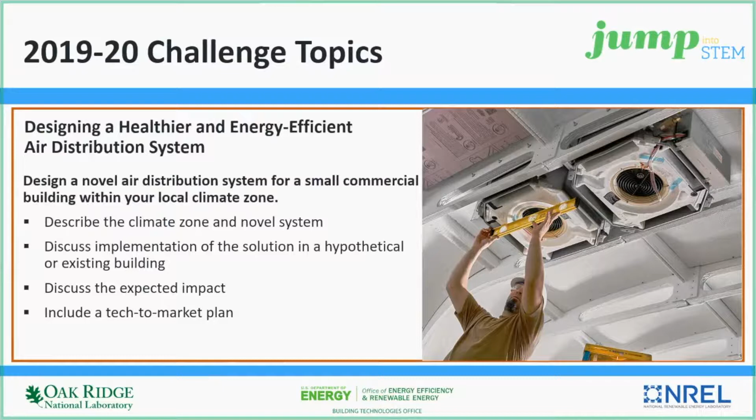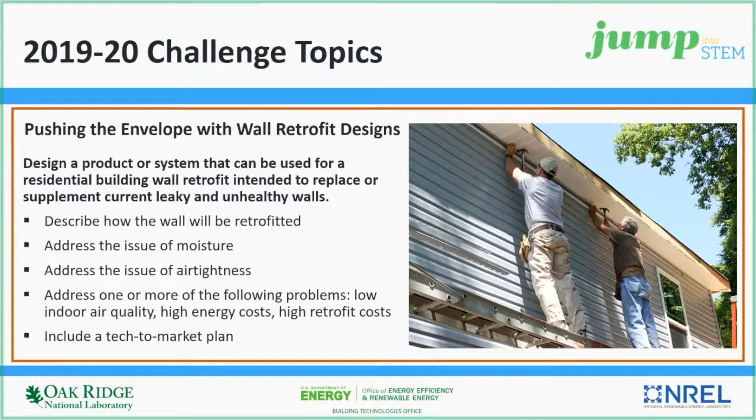We had 3 internship winners from last year's Jump into STEM competition. We had 2 interns at NREL and 1 intern at Oak Ridge National Lab.

At NREL, Jump into STEM intern Cade Lawson worked on Comstock, one of the building energy modeling tools for the entire building commercial stock of buildings in the United States.

Our Jump into STEM intern Sarah Tinsley worked at Oak Ridge on EnergyPlus and OpenStudio modeling, for commercial building energy modeling. And Carl Woodard worked at NREL on developing thermal energy storage through the use of phase change materials.

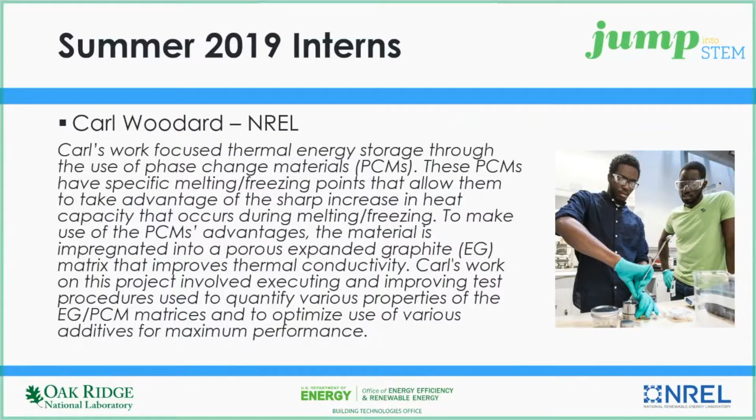At this time, I'd like to introduce our technical presentation and our technical presenter, Dr. Michael Kane from Northeastern University. His topic is going to be on occupant-centric building controls. Dr. Michael Kane received his BS in architectural engineering and his MS in Civil Engineering from Drexel University. He has an MS in Electrical Engineering and a PhD in Civil Engineering from the University of Michigan in Ann Arbor. Dr. Kane is an assistant professor of Civil and Environmental Engineering at Northeastern University.

Prior to this, he was a fellow at the United States Department of Energy's Advanced Research Project Agency for Energy, or ARPA-E, in Washington, D.C. He currently directs the Automation for the Built and Living Environment Lab at Northeastern, and his research interests are in the areas of bilinear and hybrid control and human-in-the-loop control of infrastructure systems. At this time, I'm going to turn it over to Dr. Kane for his presentation.

Thanks for that introduction. Can you hear me? Yes. Great, let me switch it over to my screen. Looks like a fun Jump into STEM program, looking forward to seeing what the submissions are on IdeaScale.

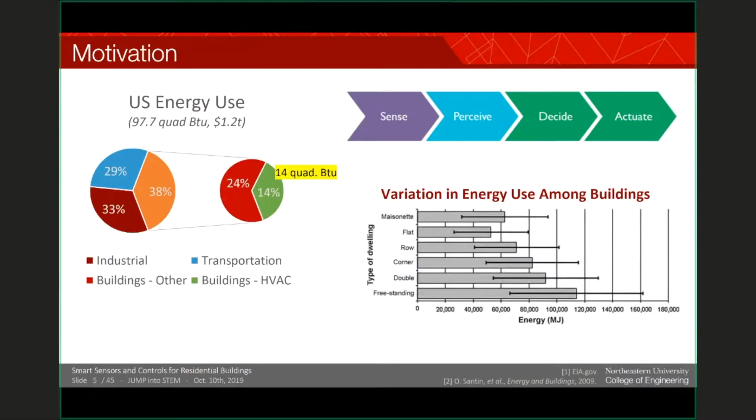It's because a large percentage of this variation—so this is saying if we were to try to estimate how much energy a building consumed based off of just what type of dwelling it is, that's not going to tell us a whole lot. And even if we have two identical homes right next to each other, they're not going to consume the same amount of energy. Why is that?

We can explain some of it through building physics, but it's really about occupant behavior. Different occupants will operate buildings in different ways.

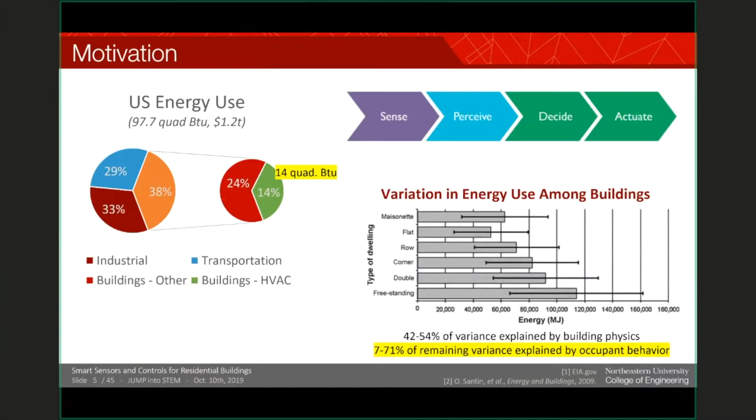So my lab and my PhD students here are really interested in working on understanding this problem of how different people operate buildings, and how we can help those people operate those buildings better with automation—not replacing their decision making with automation, but really having them work together. And in order to do that, we're taking a data-driven approach using some big data techniques.

One thing we're using is this Ecobee data set. You might be familiar with Ecobee thermostats—they're a competitor to Nest thermostats, if you've heard of them. It's essentially a smart Wi-Fi connected thermostat. This data set originally had about 27,000 homes in it, but it's now up to about 80,000 homes where we have indoor temperature, outdoor temperature, why people change set points, occupancy information about every 5 minutes from these homes.

So it's a really powerful data set to tell us about energy flows throughout a home, and the occupancy really tells us information about at least when people are doing things and where they are when they're doing them.

We've used this to not only analyze this occupant-centric problem, but some other problems that affect individuals in a house, like are their heating systems undersized or oversized? Are they undersized in heating or cooling?

So what we've done is looked through the data set to see if the heating or cooling system was on for at least 6 hours and the HVAC system was never able to reach the set point. So in winter, that means you're running your heater at full power and still not able to get to that 71 degrees you're trying to keep inside, or whatever the individuals had set.

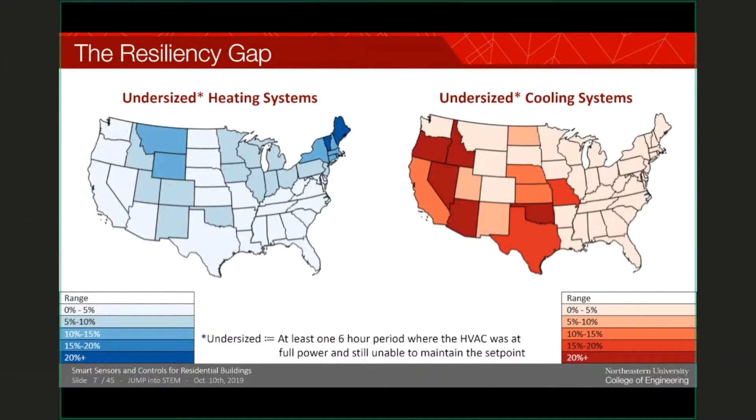Well, this is a separate project, but I just wanted to show you some other things you can do with this data. We talked about automation a little bit—so what sort of things are those automation systems doing? And do those automation systems always have the same intentions as the person?

That's not always going to be the case, because sometimes the person really just wants to be comfortable, but the automation system might be trying to do other things that the person really doesn't want to think about or isn't thinking about. One of those, which is a really exciting new area, are grid interactive efficient buildings.

This is where the building is trying to interact with the electric grid in some way, whether that's to reduce load, to shed load, just reduce it over short periods, or to shift load. So you might pre-cool a building in the early afternoon, and that way you don't have to turn your air conditioners on when everyone else is already turning theirs on. You might be able to save money on your electric bill.

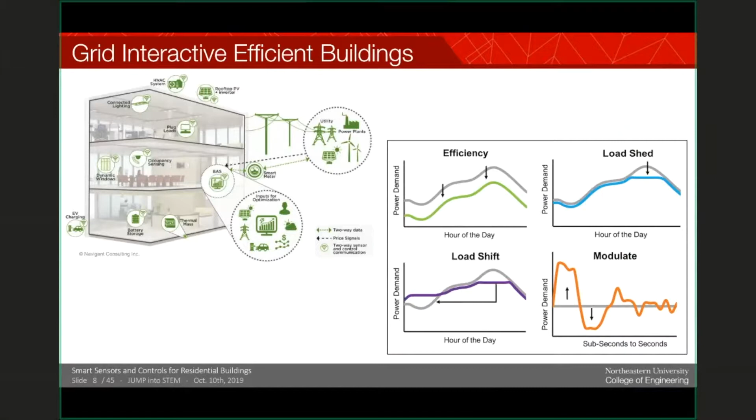And then you might even be able to modulate and have your electric demand follow electric supply from things like rooftop solar or wind. The problem with automation is it often gets what the person wants wrong, and we see this in demand response programs. We're seeing up to 30% of things that the automation system is trying to do being overridden or opted out by individuals. And if 30% of the times a control system tries to do something it's being overridden, it's not going to be a very effective automation system.

So we should really try to reduce the overrides and opt-outs that we're seeing between occupants of a building and the systems itself.

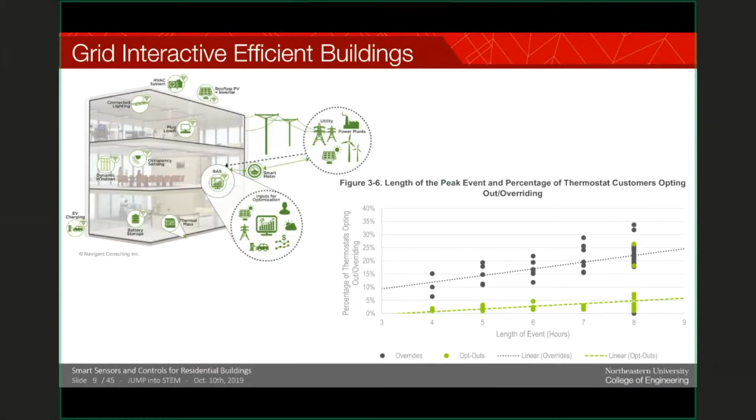The next generation of controls were occupancy-based controls. You might be familiar with this in your university or an office you've worked in, where occupancy-based controls try to turn off the lights when no one's there. But unfortunately, those don't always see you in your room, so maybe you have to wave your hands in order to get that motion sensor to detect you.

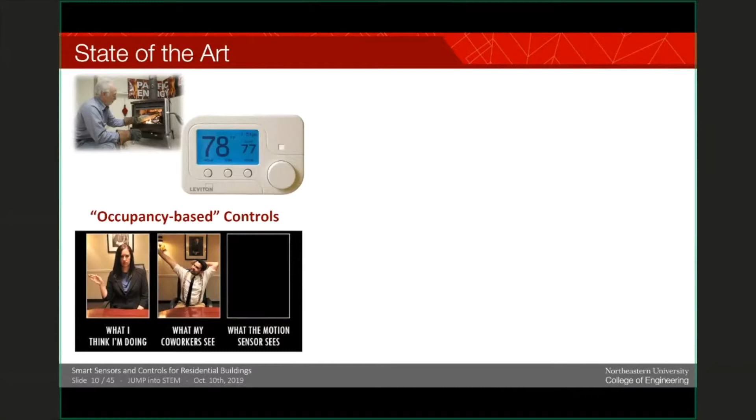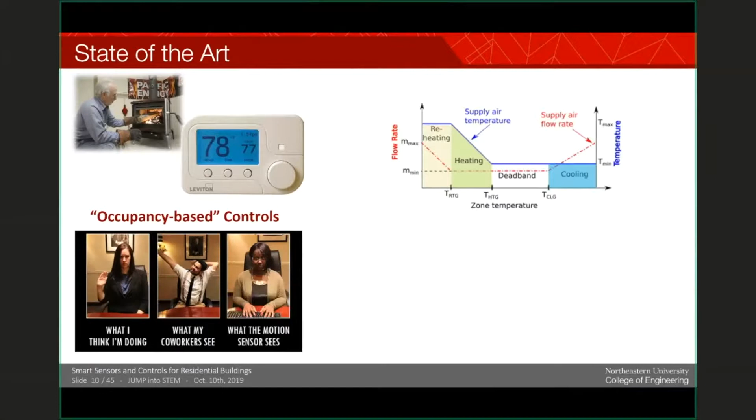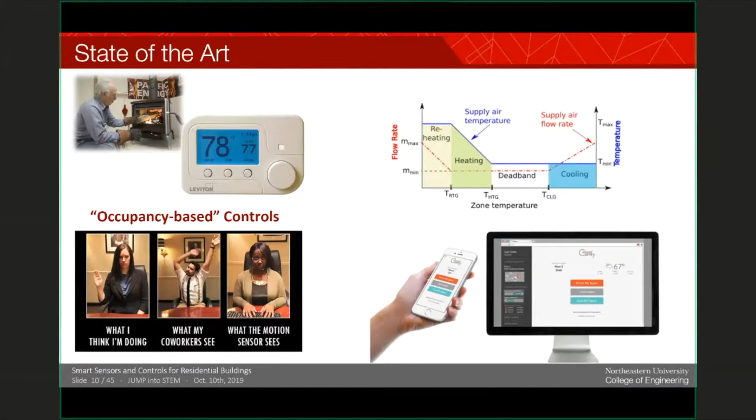We can do occupancy, or demand controlled ventilation. By measuring how many occupants are in a room, we can decide how much fresh air to bring in, which saves us a bit more. And the future is looking a lot more personalized - can we have individuals tell whether or not they're warm, whether or not they're cool? There are companies already starting to work in this space.

So what is comfort? I like to first start out thinking about how we can analyze the comfort of a person. What is a person? What are people mostly made of? People are mostly made of water, and we can say that the average person, give or take - just to make the math easy - is a 150-pound bag of water.

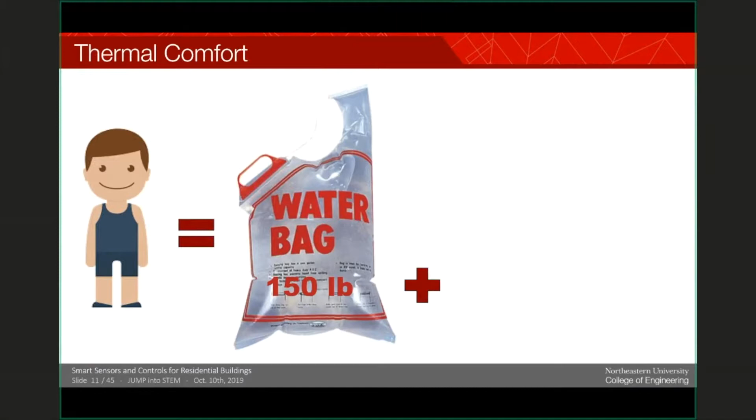The average person eats about 2,000 calories a day - that's a unit of energy. If we take that unit of energy and divide it by 24 hours in a day, we get a unit of power. So this person is converting food into movement and essentially heat eventually. How much is that? If we take 2,000 calories and divide by 24 hours, it's essentially 100 watts. And we want to keep that 100-watt, 150-pound bag of water at about 98.6 degrees.

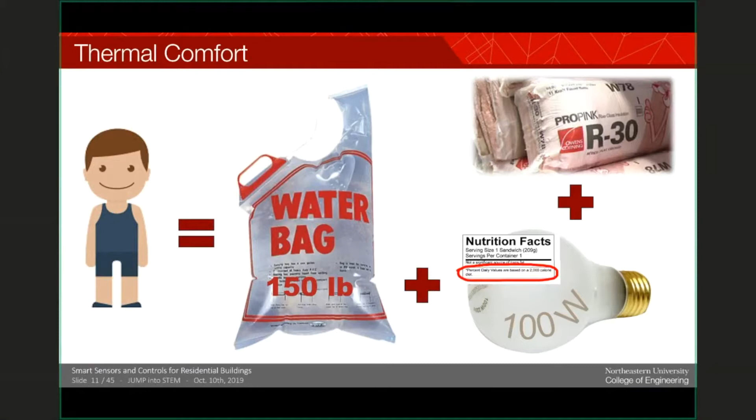So we might put a little bit of insulation on it - we might put a sweater on, different clothing on, or take top layers off in order to maintain our temperature at 98.6. This just gives a very simple model of what human comfort is.

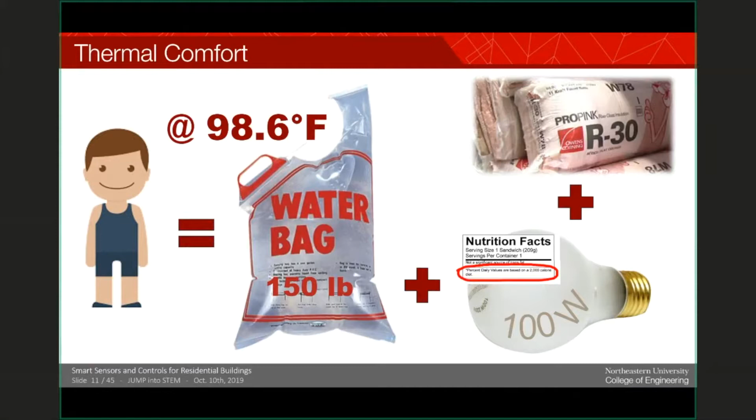Those internal temperatures change the occupant behavior. A person might be too warm or too cold, and then go back and change that thermostat.

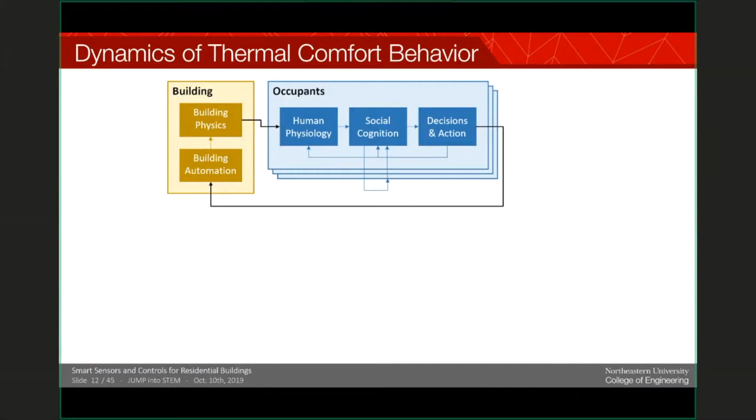So let's look at how we can model this system. Some of you might be familiar with Energy Plus, a software package developed by the U.S. Department of Energy along with Open Studio. These are essentially tools for modeling building energy use. There's some easier tools like eQuest, or more powerful tools like TRNSYS, or other kinds of tools that you might find throughout industry.

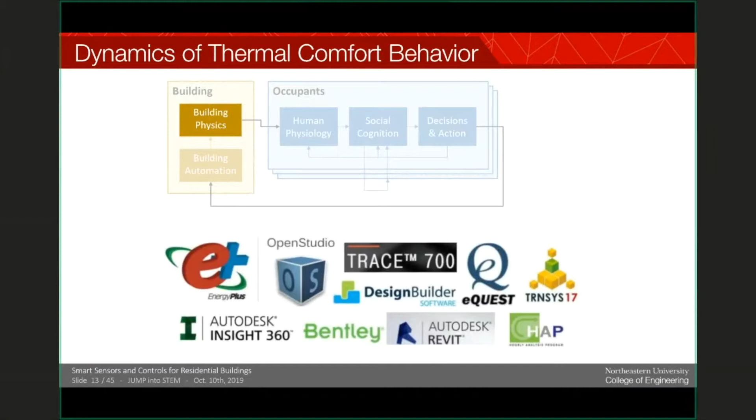Human physiology, we're pretty good at detecting this. This is essentially the model we just talked about, that 150-pound bag of water with a 100-watt light bulb inside. We can essentially map metabolic rate, your clothing, the air temperature, how much air is moving over you, the radiant temperature, and the relative humidity to whether or not someone feels neutral, hot, or slightly cool. This is pretty standard practice in industry.

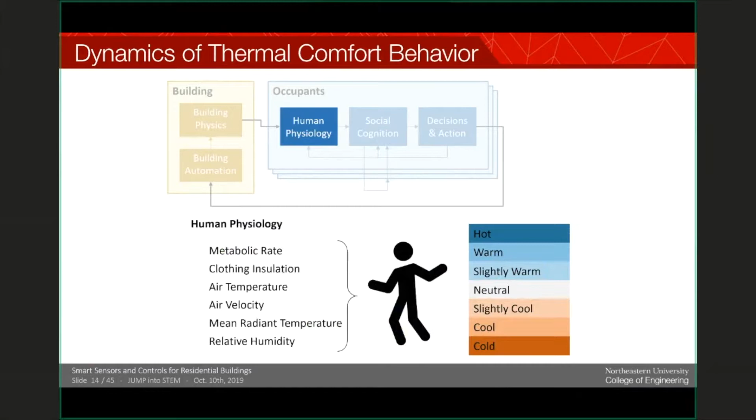The challenge is, what do we do when the person feels hot, feels cold, or only feels slightly cool? There's some pretty complex cognition going on when people are thinking about this. They might be thinking about whether they can even affect it. Have you ever been in a room where you're cold, but you don't bother getting up to change the thermostat, either because your parents are going to yell at you, or your past experience has told you that thermostat is essentially broken? It doesn't actually do anything.

So we have to find some way to model this cognition process. There's a couple different theories we're exploring, whether it's social cognitive theory or theory of planned behavior, and these ultimately end up with the person deciding to take some sort of action. But even saying 'I'm going to take an action' has some openness to it. What sort of actions can a person take?

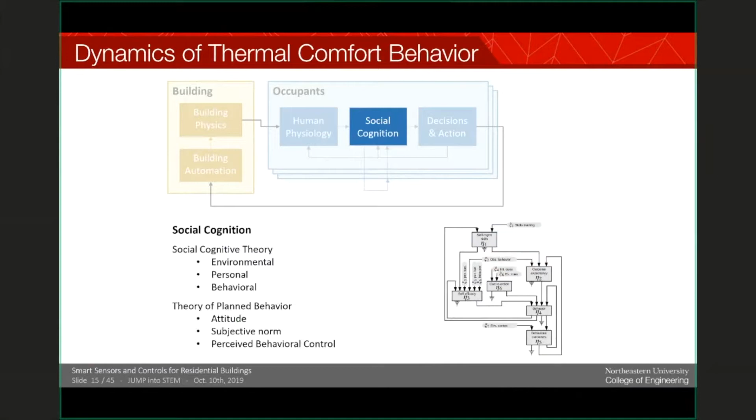So let's come back to that thought experiment. Is it possible to open the floor up to responses to this thought experiment, or should I just keep going with some hypotheticals here?

I think we can open the floor. Is there a hand raising feature in this app? There's a chat, yeah. I guess if you have the chat feature, anyone want to type in some answers about what you would do when you get home from work and it's 65 degrees and you want to feel warm? 75 degrees? Okay, any other answers in there? We've got 25 people on the line here. Let's get a little bit of audience participation.

Okay, you usually set your thermostat to 70. Okay, 72 makes you feel comfortable. So Eric here would set it to 70, maybe trying to save energy. So we have some motivations here. Maybe some people are trying to set it up a little bit, and we have one friend here from Canada using Celsius. We can see that some people are trying to change their temperature in order to save energy, or even save more energy by putting on a light sweater. Some people say set it right to the temperature that they're comfortable with, and others say set it to a temperature that's a little bit higher than we're comfortable with. So those are different things.

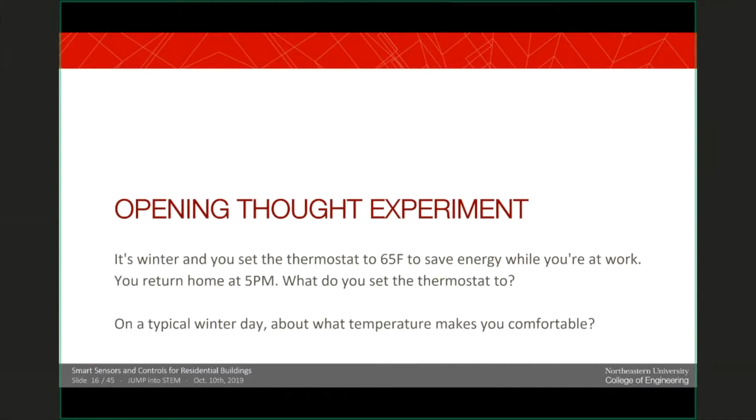If we wanted to model the behavior of different people, we'd have to model both the physiology, the cognition, and what sort of decisions and actions they're taking. There are two major theories about how people take actions, or another way to say this is that there are different mental models people have about why they make the decisions they do. People try to optimize their decisions, but given the limited information they have.

So the two theories are, quoting a research paper all the way back from 1985: one theory says you just turn the thermostat up, and once it gets to the desired temperature, it kicks off automatically, and it'll kick on and off to keep it at that temperature. That's the feedback theory. Valve theory says, as a person described it, the thermostat is like a gas pedal — if you want it to get hotter faster, you have to accelerate more, you have to press down on that gas pedal and really push it.

We got responses in both of these buckets here, but there's an issue with that valve theory model.

That idea, I'm going to set this thermostat higher than I actually want it to be because I think it'll get there faster - the issue with that mental model is that's not actually how thermostats work. Thermostats are not valves. The way a thermostat works is more like that feedback theory.

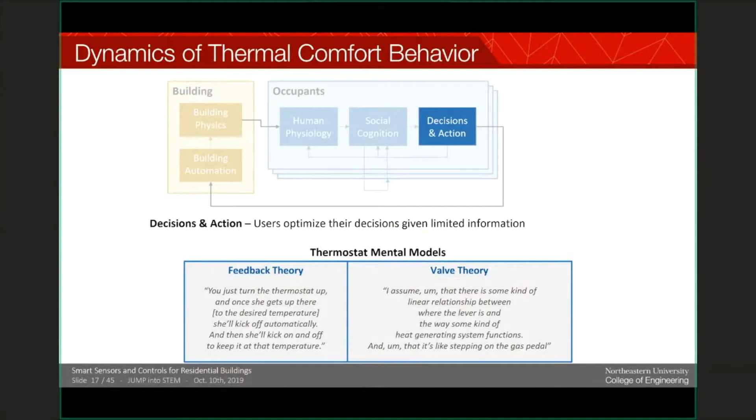If the temperature is below the set point, the heating will kick on at full blast. There's no in between in almost all modern thermostats, and same thing for cooling. If you want it to get cold, set it to what you want, and it'll get there as fast as possible and stay there. So this idea that different mental models affect not only how people interact with the system, but also affect system performance - people might not be interacting with the system optimally. I hope some of you who have valve theory might reconsider how you adjust your thermostat this winter.

So let's look if we can see some of these behaviors in this ecobee dataset. What we've done - I saw that there was one person that responded. How was it that they responded? I like it at 22 degrees Celsius, but my wife wishes it to be 24 degrees Celsius.

So there are issues where there's not only mental models or things you can affect yourself, but social factors as well. In order to really process the data and not get caught up in social factors, we wanted to focus on individuals. We looked at the dataset where people self-declared they're living in the home by themselves. Out of the 27,000 homes, there were 1,400 that were single occupancy - a significant cutback, but still we have 1,400 people, and we have up to two years worth of data from these 1,400 people.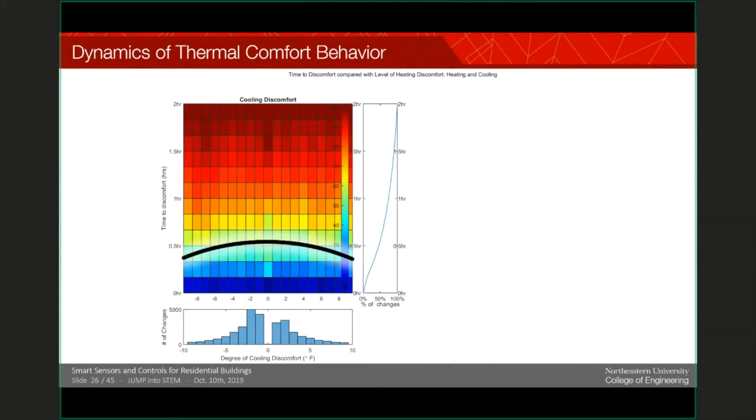So what we can do is actually make an entire plot of this data, and we can even fit a line to that average case. We can say that on average, a person will notice a 2-degree temperature difference in about half an hour, while they'll notice a 10-degree temperature difference in about 15 minutes. So if we want to modulate the load, we could modulate large temperature differences over short periods, but if we want really long periods of modulation, we can only use small temperature changes. We can do this for heating season as well.

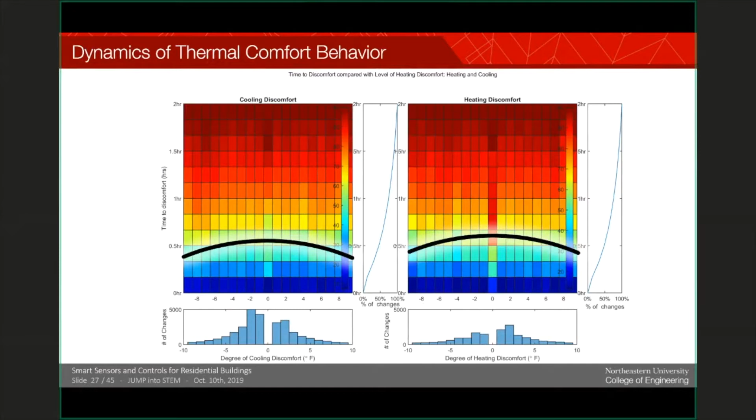So that wraps up some of the approaches we've taken to learning from big data to understand thermal comfort behavior as this process of physiology, cognition, and decision making. Ultimately, we'd like to integrate this into some crazy complex system that hopefully ends up not being that complex and is really interpretable by users. We want this system to improve our HVAC controls, improve how much energy storage is stored in a battery on site, improve mobility efficiency, and maybe if we're charging an electric vehicle at home, really balance all of these systems together.